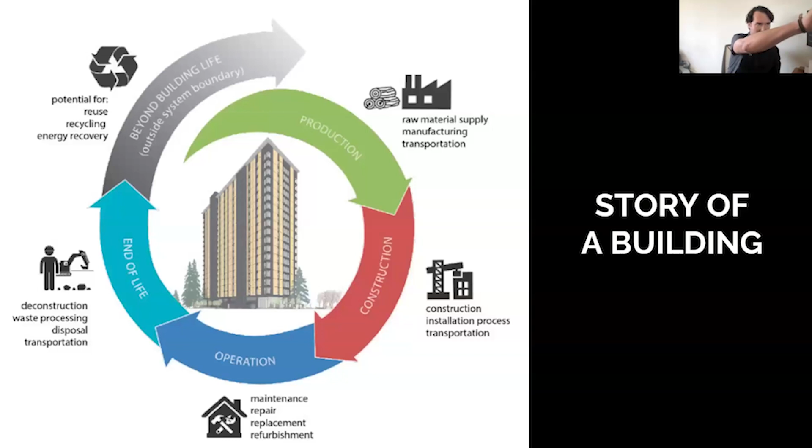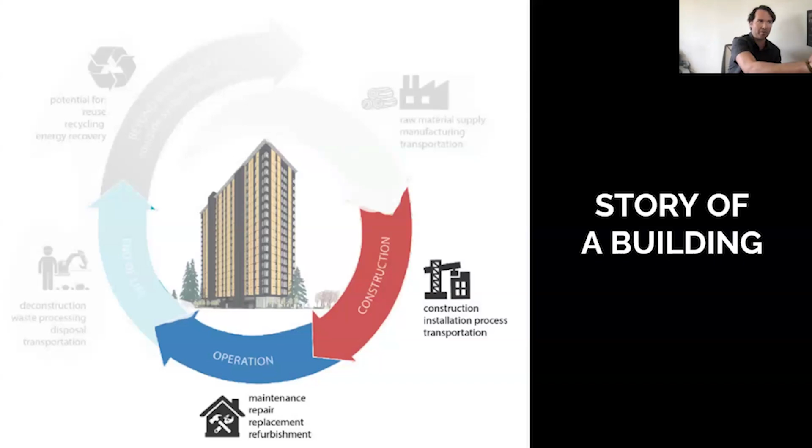But typically we're most focused on the construction and operation part of this diagram, or part of the story. And so what we're going to be focusing on today is filling in these parts that I have blanked out here. So where do buildings come from? Buildings come from nature's carbon library.

And nature's carbon library has 3 branches: farms, forests, and mines. So farms move sky carbon into plant fiber and soil and seeds. And the carbon building block time frame here is less than a year. So materials like straw, hemp, this is kind of like the carbon checking account. So in 3 to 12 months, you have a useful raw material, a useful building block for something that you can make a home from.

Forests move sky carbon into trees and soil and wood fiber. So this carbon building block time frame is 30 to 100 years. So this is more like the carbon savings account. So we've got wood fiber, cork. So in 30 to 100 years, you have a useful raw material that you can make a home from.

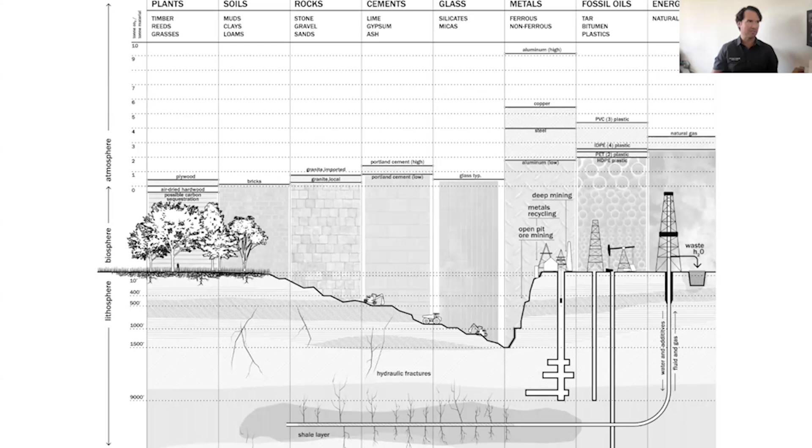So putting all of these ideas in one infographic, this is an infographic from a carbon field guide for designers, or a field manual for designers. I might be messing up that title, but you'll probably find it. So over here on the left, we have our plant-based materials, and then moving right, we have our mineral-based materials.

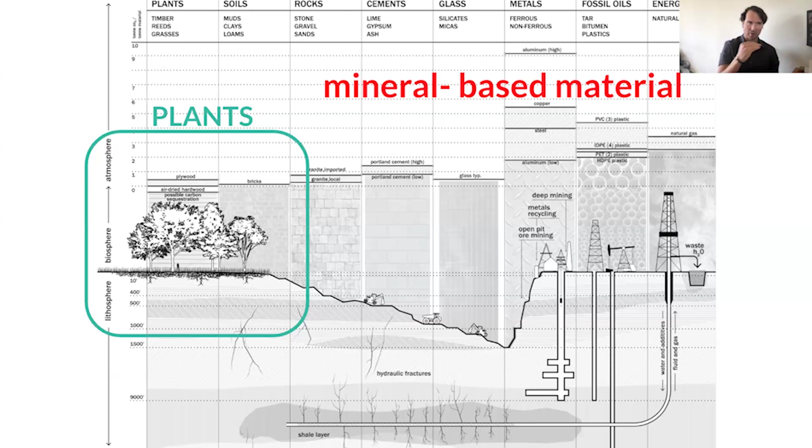And what this infographic is showing is where we're going in the Earth's crust to harvest or extract these materials, and then how that harvesting or extraction also represents a flow of carbon into the atmosphere of our planet. And the big idea here is that where building materials come from shapes a building's climate impact.

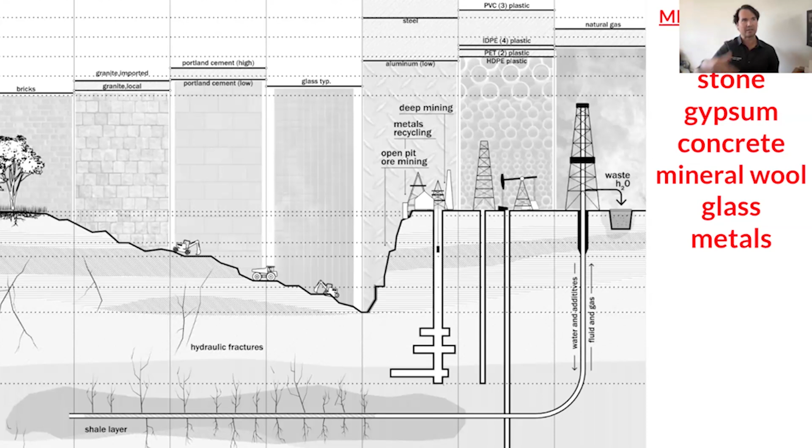So over here on the mineral-based side, starting over on the left, we've got bricks, and then we've got granite, and then we've got limestone for cement, we've got glass, and you can see we're going kind of further and further into the Earth's crust. And then as kind of a subcategory of mineral-based materials, we have our plastics. So these are basically fossil fuel derivative, fossil fuel byproduct produced materials. And so we have things like PVC, LVT, latex paint, polyurethane, foams.

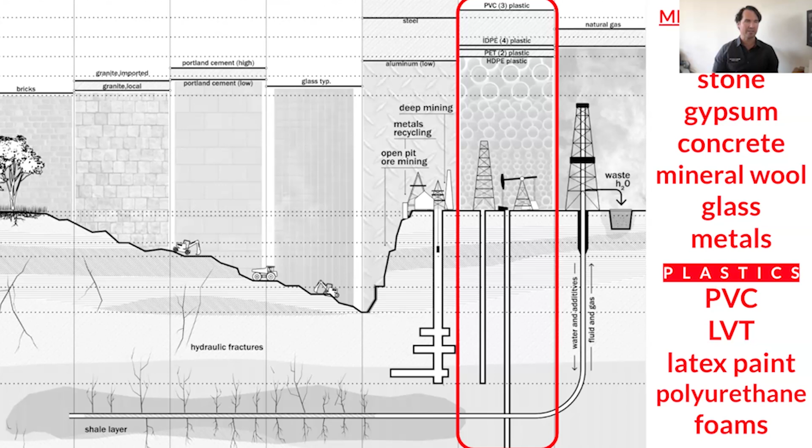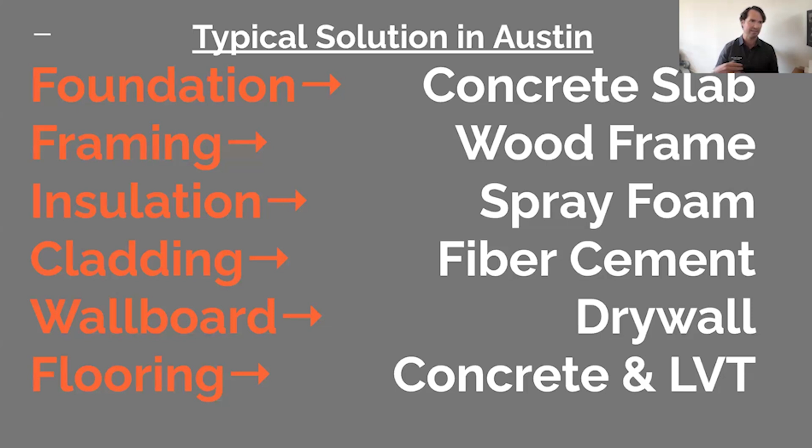And so thinking about this as a context, with this project, the question I was asking is, what happens if I put embodied carbon and health impact of materials first when designing a house? So starting by considering what the baseline is in our market in Austin, in our home. The material baseline for a typical home in Austin looks a lot like this. These houses have a concrete slab foundation, wood framing, spray foam insulation, fiber cement cladding, drywall, concrete, LVT flooring. These material sources are primarily mineral.

And so thinking about kind of reimagining this, I was reminded of this book, Food Rules by Michael Pollan. And in this book, Michael Pollan lays out a kind of simple rule for eating in a way that is beneficial for your own health, but is also beneficial for the health of the ecosystem that you're a part of. So that rule is eat real food, not too much, mostly plants.

So I thought about reframing this with respect to design and building. So what if it was build with real materials, not too many, mostly plants? And real as in not heavily processed. So veggies and wood, not Fritos and foam. Or in other words, no home Twinkies.

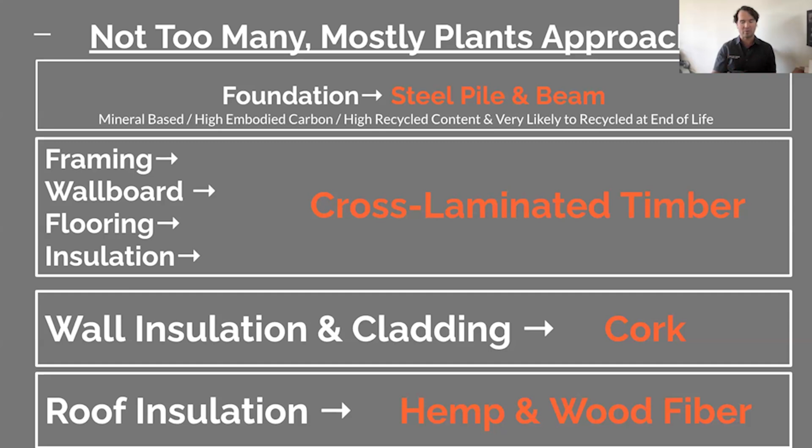So reframing this not too many, mostly plants approach, we looked at a foundation of a steel pile and beam, and then using cross-laminated timber to take care of our framing, wallboard, flooring, and a smaller portion of our insulation. And then with wall insulation and cladding, we used cork. And then with roof insulation, hemp and wood fiber. So this is the mostly plants kind of wall assembly.

So one of the beauties of this wall assembly is it's a 3-component wall assembly that sort of mimics the makeup of a tree. So we've got 2 inches of Amorim MD facade cork, providing R7 continuous on the exterior of the CLT panel. And then our self-adhered air and water barrier from VaproShield. And then 4 inches typically of sustainably, responsibly sourced softwood with our cross-laminated timber. And the cross-laminated timber is exposed to the inside and is providing our structure. And the cork is exposed to the outside and is providing our insulation as well as our final finish to the exterior.

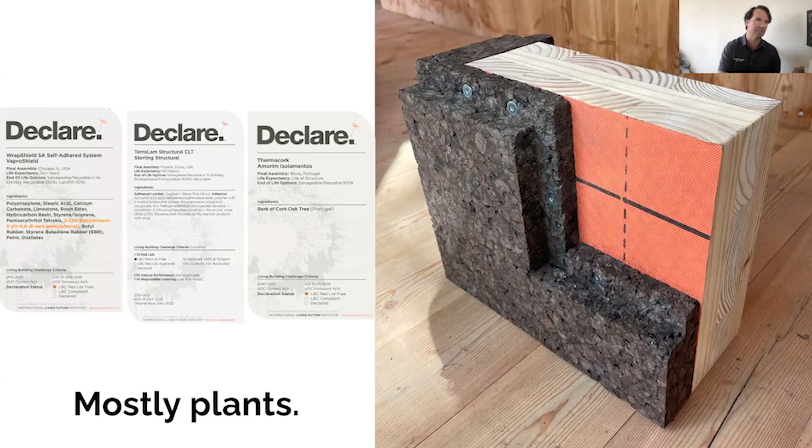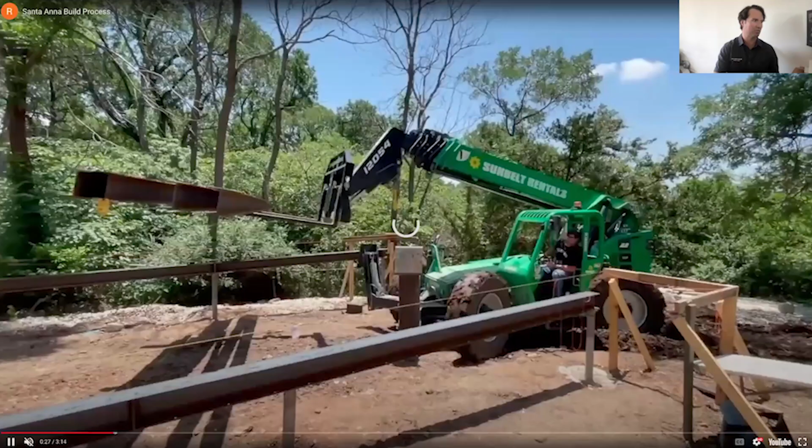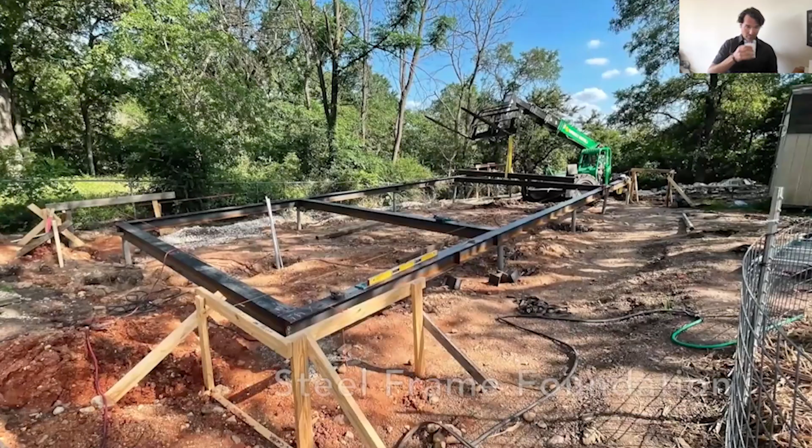So here again is what the project looked like all finished, the Mostly Plants house. And here's some construction footage of the process. So starting with the steel frame foundation. The steel frame foundation minimized carbon in comparison to a concrete slab, and gave us a flat surface to start putting cross-laminated timber panels on top of.

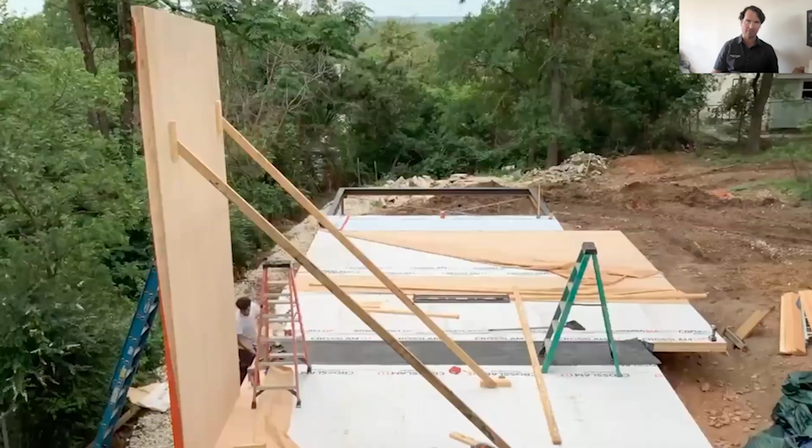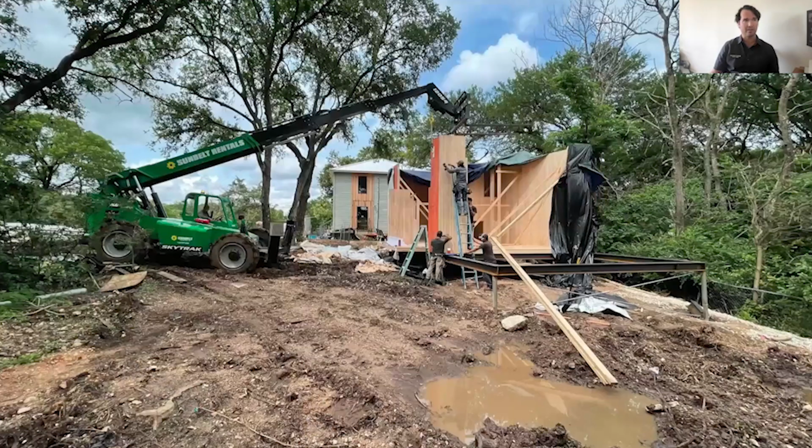There's the cross-laminated timber showing up on site. And then us maneuvering those panels, the floor panels being 5.5 inches thick, the wall panels mostly being about 4 inches thick. And starting to put this together, we were able to apply some of the air and water barrier on site, and then tape the seams with wrap flashing to complete the air and water control layer.

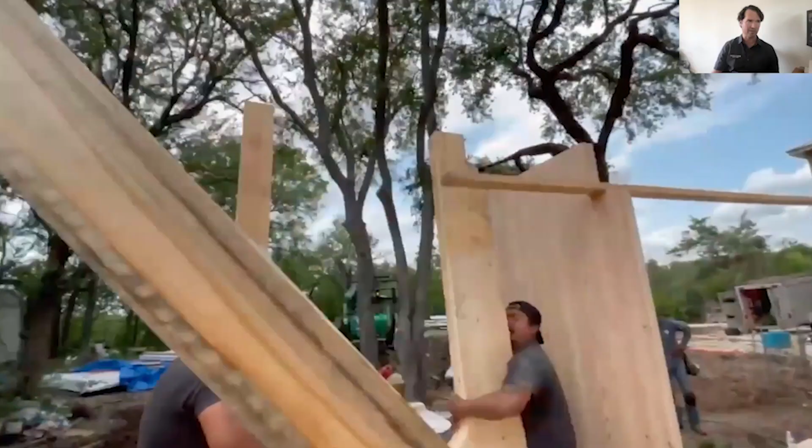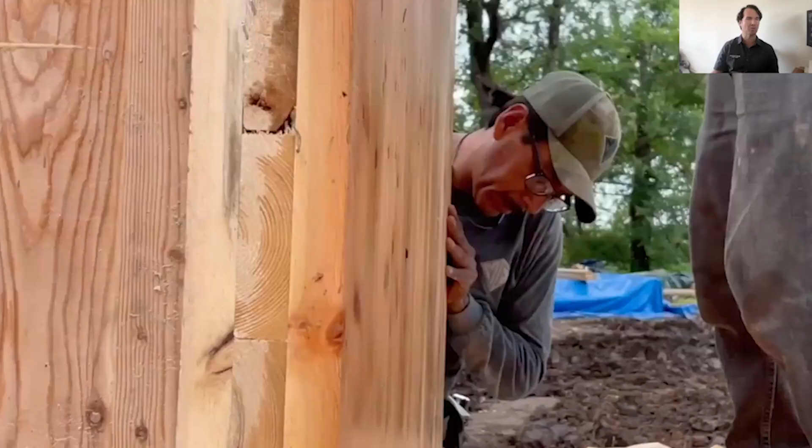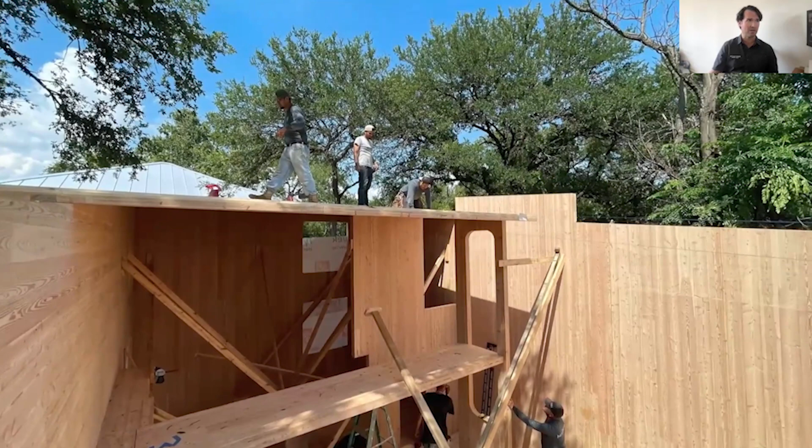So here in this image, you can get an idea of how all these materials were cut to fit together like a big piece of furniture. So we're sliding this panel with a curved window cut in it. How it all slides together. And then putting on the roof panels. The roof panels were the longest panels on the project, so some of them were about 23.5 feet long.

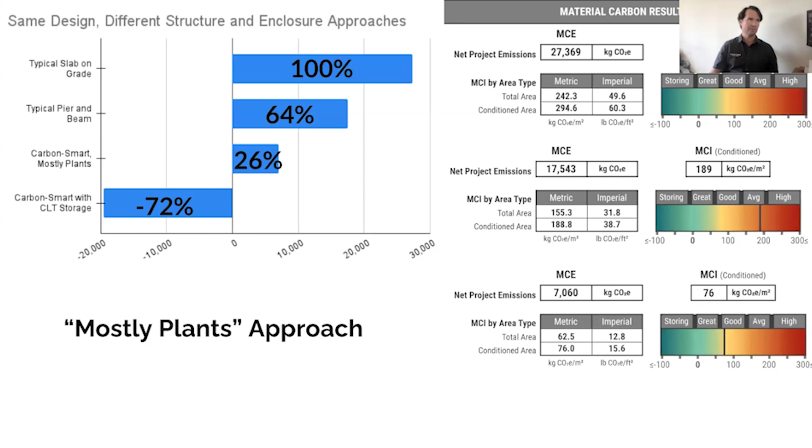So what's the actual difference in carbon impact between typical and Mostly Plants approaches? So here, starting at the top, if we built the same project in terms of space and walls, but did it in a more typical way, or typical for Austin: fiber cement cladding, spray foam, drywall on the interior, and that concrete slab. This is establishing our 100% embodied carbon impact using the BEAM calculator from Builders for Climate Action. And so here we've got 27,000 kilograms of carbon dioxide emitted.

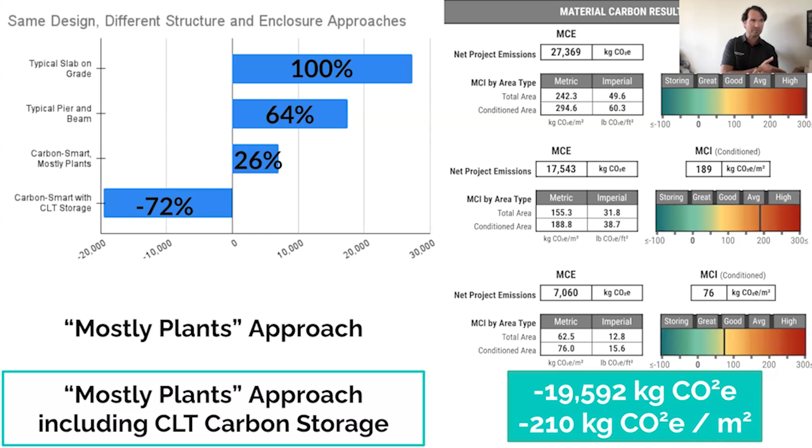If we took that down to a pier and beam, but kept the spray foam, kept the fiber cement, that's going to knock things down to 64% of that 100% baseline. If we move to our Mostly Plants approach, that takes it down to 26% of the embodied carbon impact of the typical slab on grade. And then if we include the biogenic carbon that's locked in the cross-laminated timber panels, that takes the carbon impact down to negative 72% of that original 100% baseline.

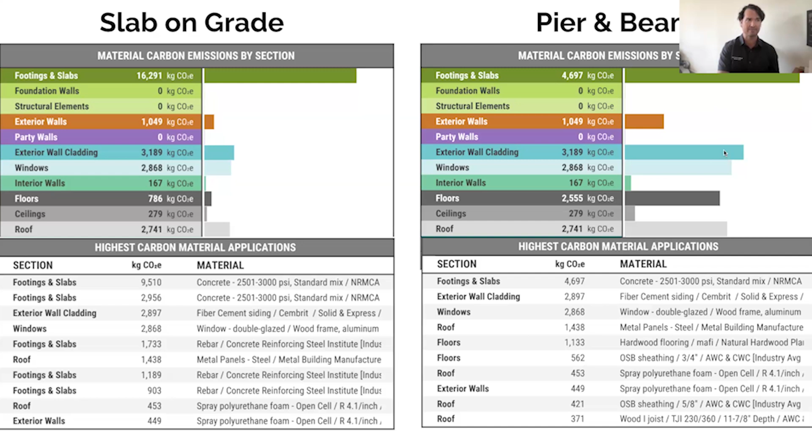So moving through some of these options quickly, you see with the baseline over here on the left, the slab on grade, that slab is the biggest part of your carbon impact. If you take the slab out and go to a pier and beam, then the concrete for the pier and beam is still the biggest part of the carbon impact. But then the exterior wall cladding and the walls start to catch up.

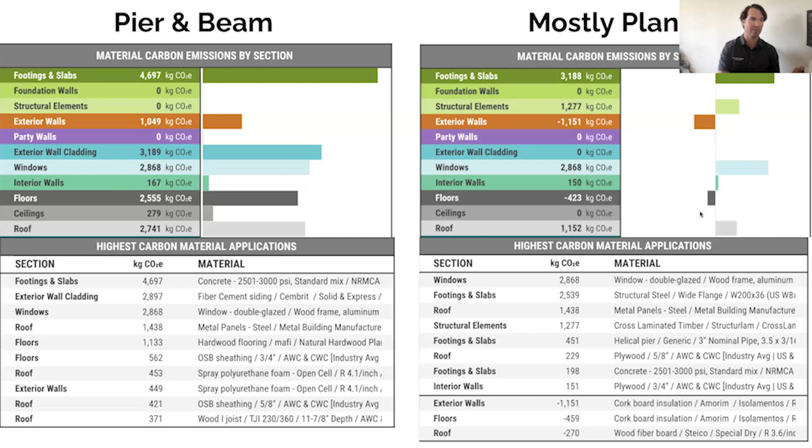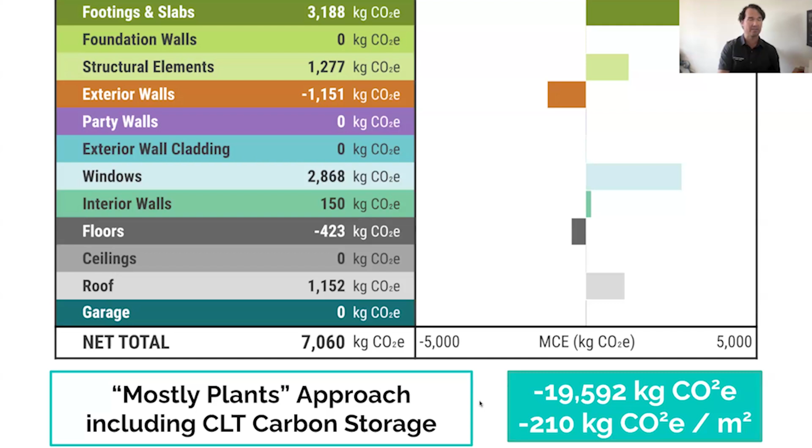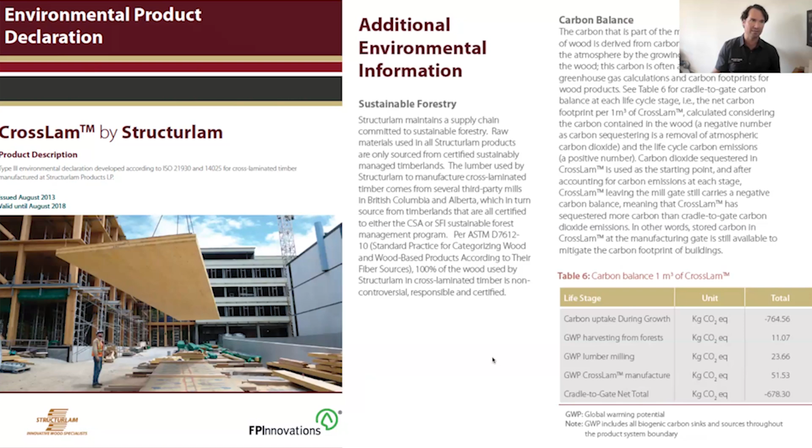So thinking about cross-laminated timber, the pros of cross-laminated timber are it's a carbon storing, structural, and finished material. It replaces your structural framing and sheathing, can replace drywall, paint, and finish floors. And easy air sealing from panelization helps replace high carbon toxic materials like spray foam.

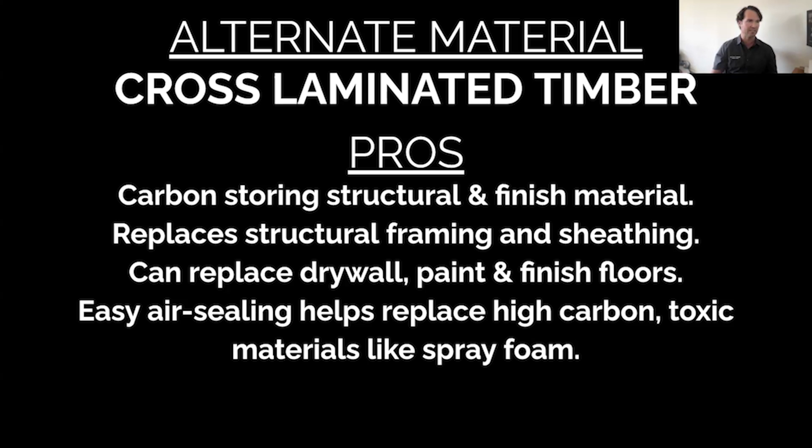And the cons are there is a complexity of carbon accounting for virgin forest products, which I'm not going to talk much about here, but we could address that in the Q&A if people have questions. And it's new and different. The panelized approach requires a different design and construction process, and it requires careful optimization to be more cost competitive.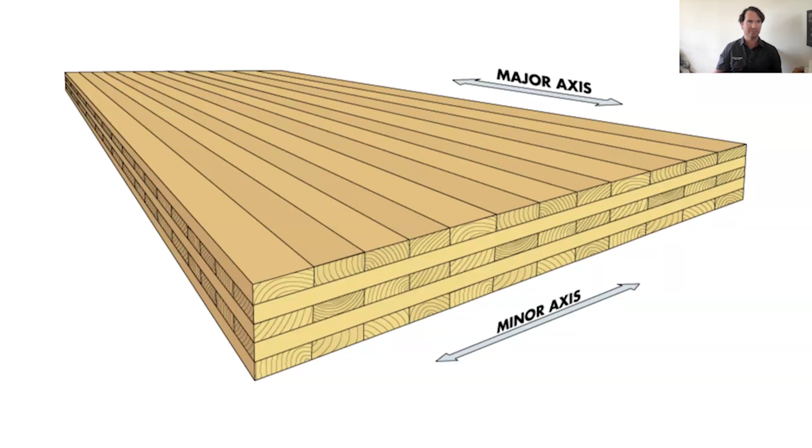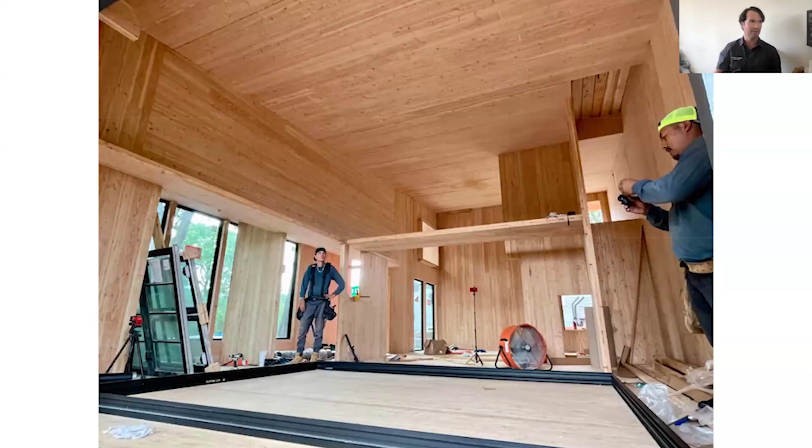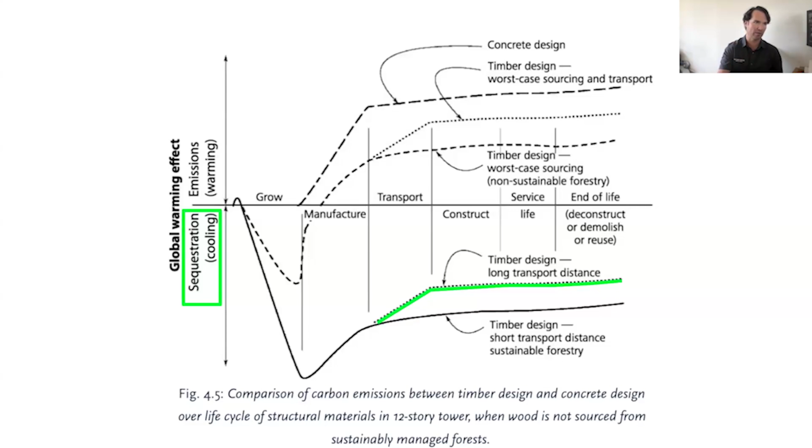And touching on carbon storing, this carbon sequestration of a plant-based material, this is from The New Carbon Architecture. And this is showing when a tree grows, that growth represents net carbon storage. And that carbon storage is typically greater than the manufacture and transport of a final timber product like cross-laminated timber, as long as it's from a sustainably managed forest.

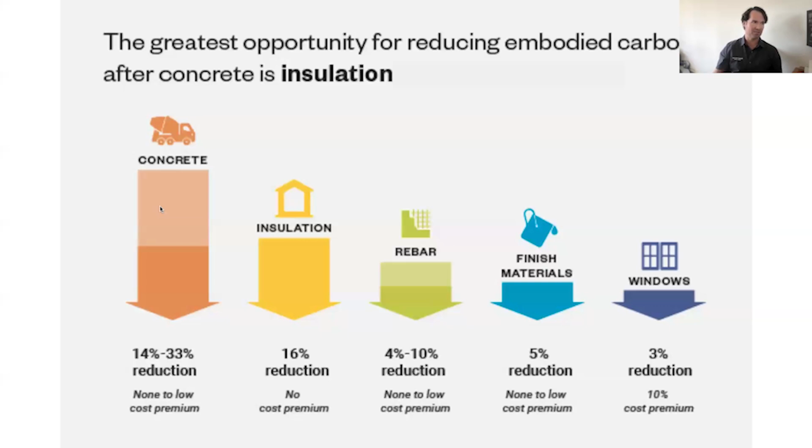And then beyond that, the greatest opportunity for reducing embodied carbon after concrete is insulation. So going over the insulation materials that we used on this project. So Amorim cork insulation. Pros of cork insulation are it's a carbon negative, completely non-toxic material. And it's a unique cladding and insulation all in one. And the primary cons are that it's new and different.

So why cork? Again, over here on the left, you can see the Declare label, the ingredients. It's just bark of cork oak tree. That is it. Cork, when it ages, sort of looks like stone, but it insulates like foam at about R4 an inch. Cuts like wood, hydrophobic, carbon negative, zero toxins.

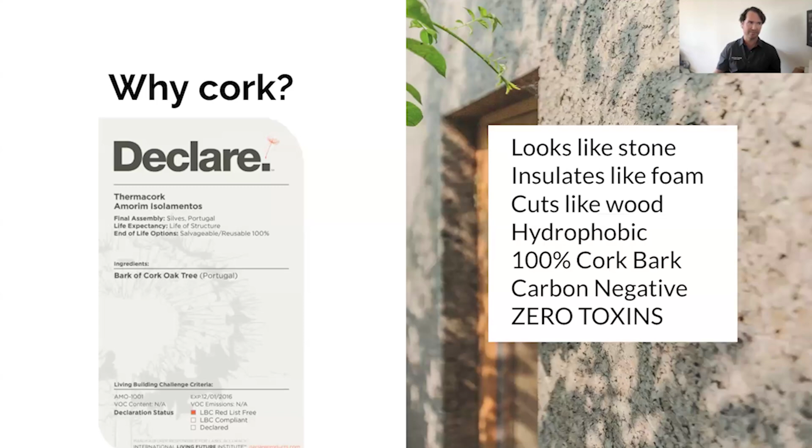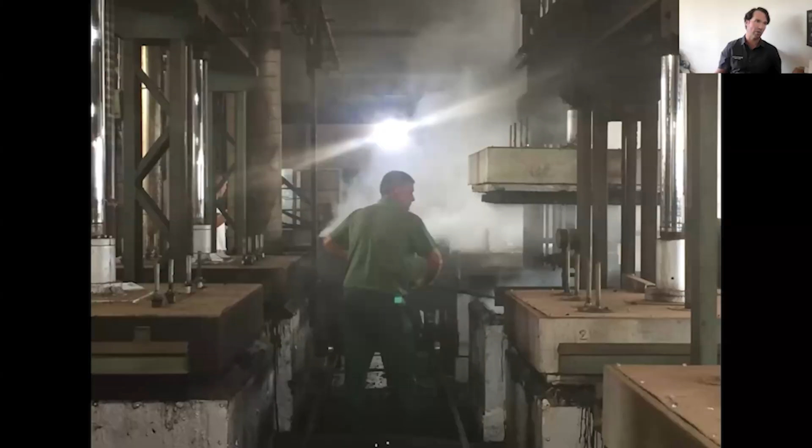So the story of cork kind of all starts here. They peel the cork bark off the tree every 9 years, starting at 25 years of a cork tree's life. And that peeling of the cork bark is something that's good for the cork tree's health. And typically a cork oak will have 15 to 18 cork harvests over the course of its life.

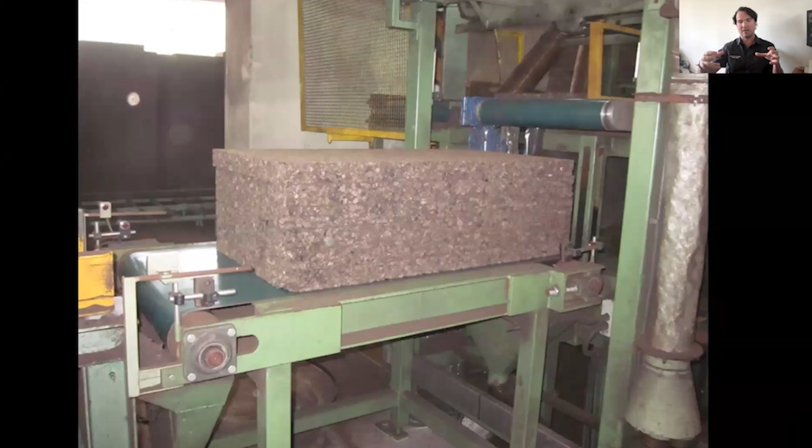So then in the case of expanded cork or this Amorim cork insulation, you take large cork granules and put them in a mold, and you heat that mold up with steam that's at 660 degrees, so it kind of heats up like popcorn, and then the natural sap suberin in the cork holds the panel together.

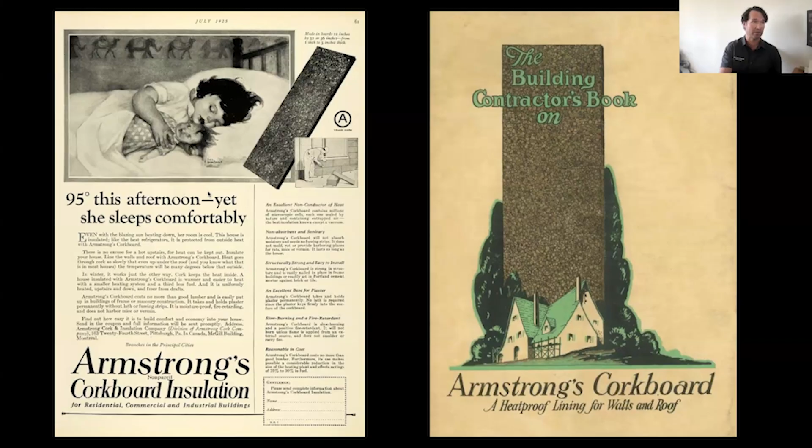So cork is actually the oldest insulation material in the US. It was originally marketed by Armstrong in the 20s. The patent was filed in New York in the 1890s. So here are probably some of the earliest continuous insulation details you're going to see from this Armstrong corkboard building contractor's guide. There's a project in San Antonio using cork as a continuous insulation.

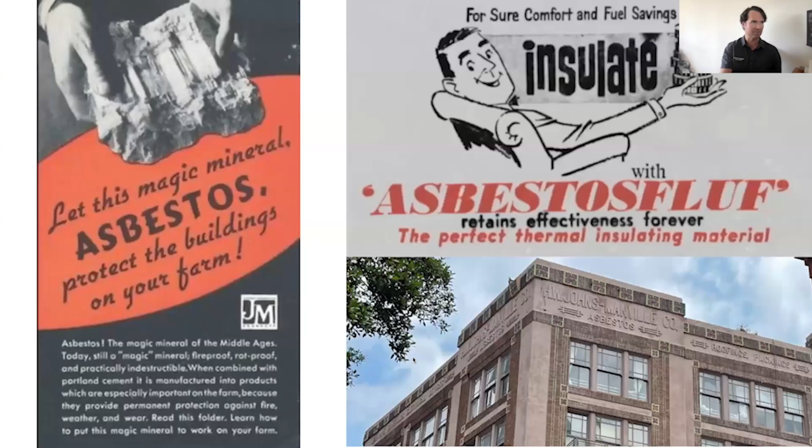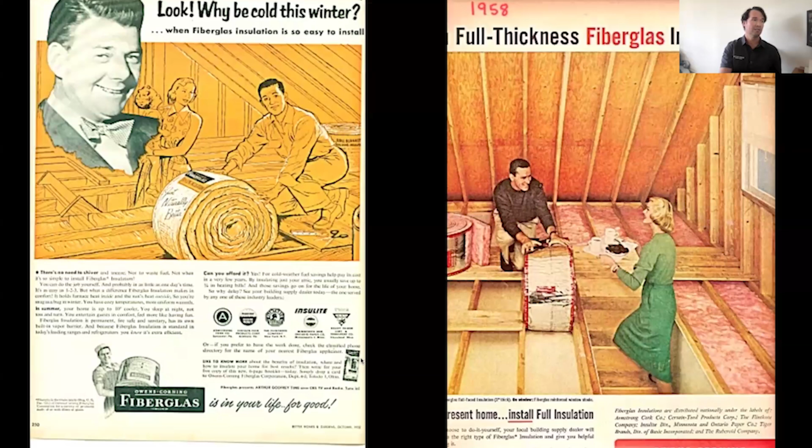And so people kind of ask, like, oh, why did we stop using cork? Well, cork insulation was used prior to the advent of materials like asbestos, fiberglass, and styrofoam, which all kind of came into the market from the 30s to the 60s. So all mineral-based materials with toxicity concerns. There's a detail of some of the cork on the project.

So then talking about some of the cavity insulation, I talked about the house as a big wood box, blanketed with plant-based insulations like hemp, wood fiber, and cork. So hemp wool, it's a carbon negative insulation, US grown, non-toxic material. Hemp is a fast-growing, resilient rotation crop. It'll grow 8 feet tall in 3 months. And the cons are it's new and different.

And an alternate material, wood fiber insulation from TimberHP. Pros, it's carbon negative, US made, non-toxic material. It utilizes waste wood fiber from cutting solid sawn lumber, like 2x4s, 2x10s. So this is a real carbon impact benefit using waste wood fiber. And you get all 3 types of insulation: loose fill, batt, and board. It has unique performance benefits related to the thermal inertia, the thermal storage of the wood fiber. And the cons are it's new and different.

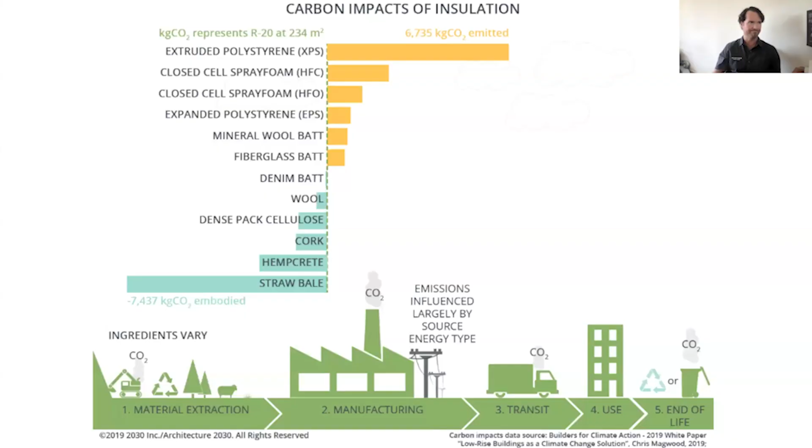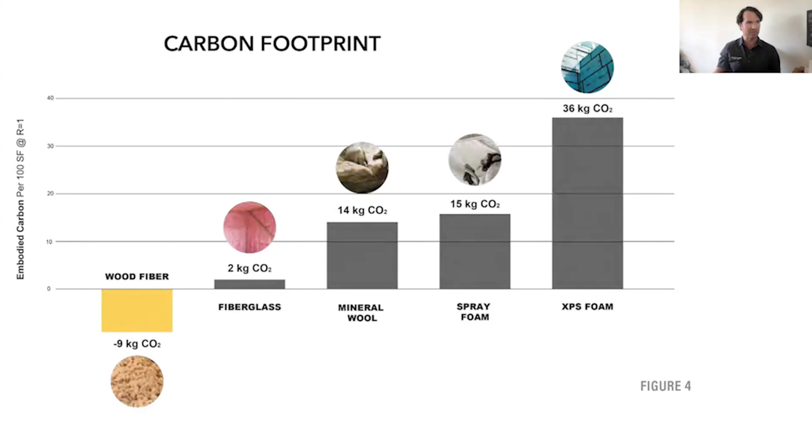So looking generally down here at the bottom with cork, hemp, straw bale, these plant-based materials provide carbon storage. Here's a graph showing the wood fiber carbon footprint relative to fiberglass, mineral wool, spray foam. And so if you looked at a 2x6 wall comparison, same wall, same R value with all foam, over here on the left, you've got 7,300 kilograms of carbon dioxide. If you did it with all rock wool, it'd be 6,500 kilograms of carbon dioxide.

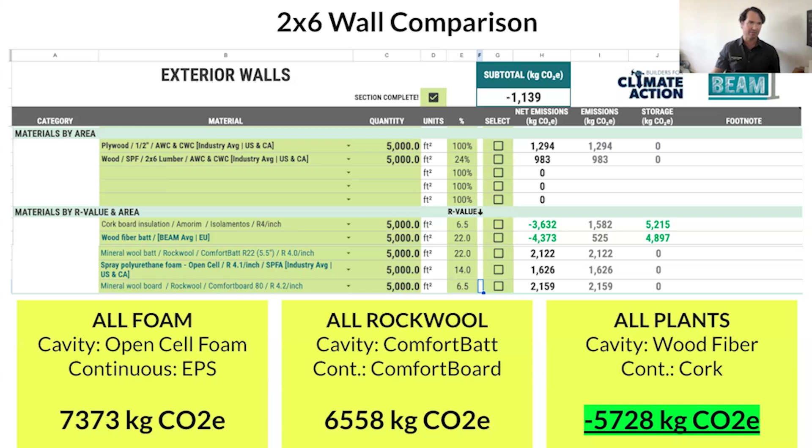If you did the same wall, same area, same R value with an all plant approach, in this case wood fiber and cork insulation, it would be negative 5,728 kilograms of carbon dioxide from an embodied perspective. So here's some quick images of us installing the wood fiber and the hemp on the roof of the building, on top of the cross-laminated timber roof structure.

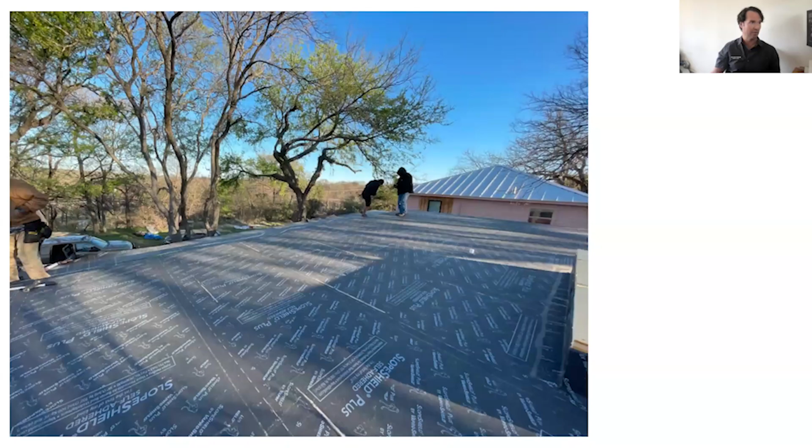So beyond embodied carbon, natural plant-based building materials tell a legible, multi-sensory story about where buildings come from. So here's a video of the project. I had no idea how I was actually going to feel in this space until we started staying the night here and actually living in the space. And it feels like no place I've ever been before.

You feel a sense of calm pretty much immediately. That was one of the biggest surprises about this project in the end, how it turned out, just the overall feel, how your body and your mind just relaxes completely as soon as you walk in the doors and sit down.

I'm Jackie Letellier. I'm Greg Esparza. We founded Cross Cabin 3 years ago as a sister company to Moontower Design Build. And with Cross Cabin, we focus on natural building materials and natural buildings.